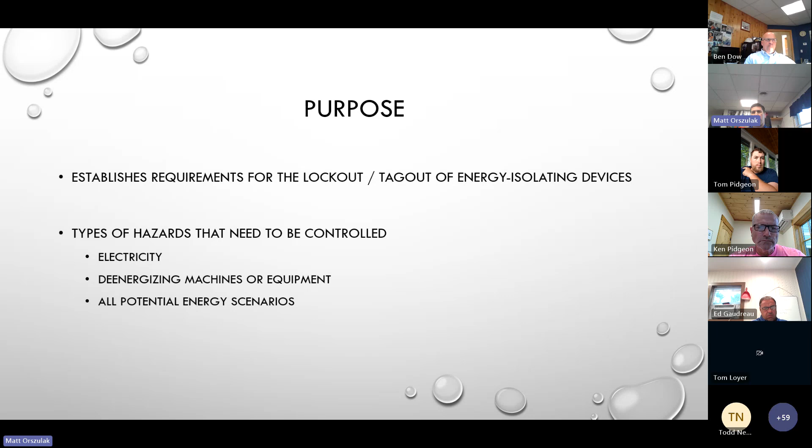For the purpose of this training, we're going to focus mostly on de-energizing machines or equipment, kind of the best practices. The biggest thing we need to do, like with everything in safety, is communication, communication, communication, once you're aware of the situation. So awareness first, then communication. Prepare for the shutdown, notify all affected employees, let everybody know what's going on, that this piece of equipment or tool is defective, it's not working properly. Then let's shut down the machine or equipment by disconnecting its energy source.

Sometimes it's as simple as taking the keys out, removing it, and putting this caution out of service tag out there. Because we want to make sure that the energy isolating devices are physically located and placed in the off position to disconnect from its energy source. It's the biggest thing - it can't move while someone's underneath it or around it. It can't shift or move, and someone could get pinched, struck, or caught in between all those hazards.

Tom and myself purchased more of these caution out of service, do not move tags. We're going to not only have them here at the shop, but we're also going to have all the foremen have them. So if there is an issue on a piece of equipment on a job site, we could tag it out, or the foremen can tag it out before the mechanics even get there, so everybody is aware and has that proper awareness not to jump in a defective piece of equipment. That's something new we're adding to our lockout tagout program.

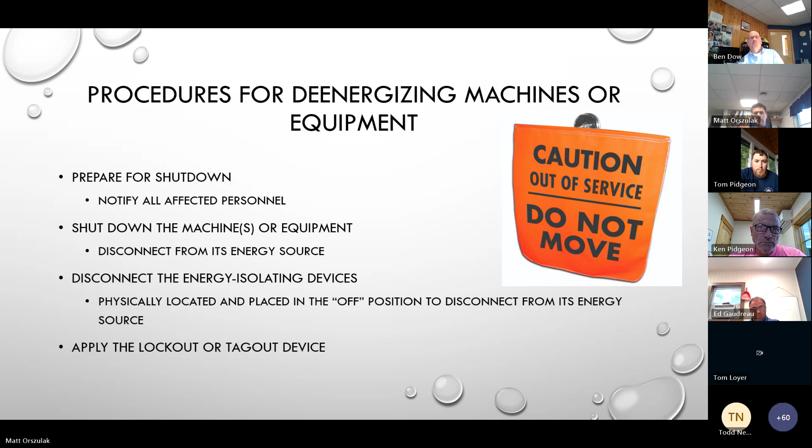Then we have just as that other potential energy sources, and that's one of the big ones that we have on the JHA every day, just as you're surveilling and looking at your job sites of what could potentially go wrong regarding potential energy. We have some basics on the JHA that we kind of preloaded that you can select. If there are any additional ones that you guys want to see us have on our JHA, please let us know - it's an easy update that we could do.

We just want to make sure we're paying attention to these potential hazards, because these are the ones that can really hurt somebody pretty bad. So we've got to put a high priority on our awareness on our job sites, because a lot of times we might have to get an engineer involved regarding if it's holding up a duct bank or digging deep next to a foundation or something like that, so we're covered in a really bad situation. That's really all I have - just raising the awareness and making sure we're tagging things out, and everybody knows we're not utilizing defective equipment, and who the affected employees are.

Anything to add? Yeah, if you see us this coming week, just make sure to - and if we don't give you a flag - just make sure to remind us.

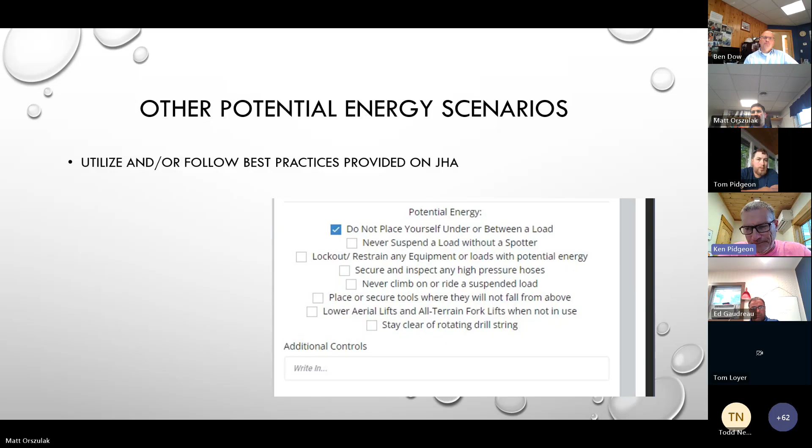Thanks, also Tom, I think of doing the load test, anchor load test - a lot of potential energy built up when we pull on anything with a jack, especially when you bring it to very high loads. Okay, thanks guys, take over the screen here. You're welcome, sounds good.

Can you see my screen? Yeah, we see you zooming in to 150. All right, oh, and you can see me zooming in. Good, all right.

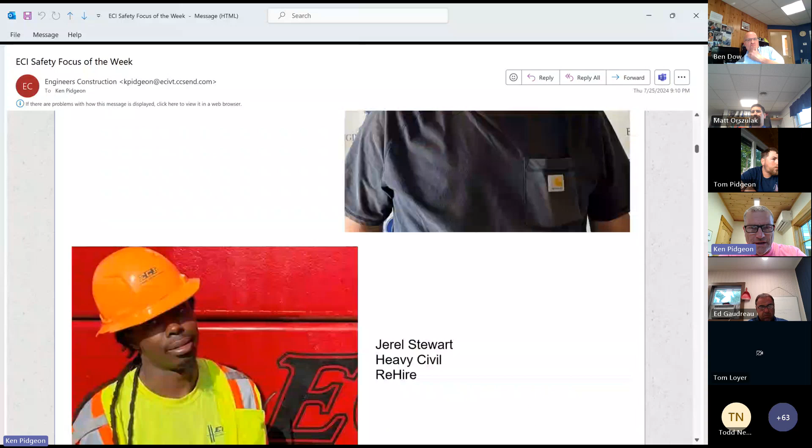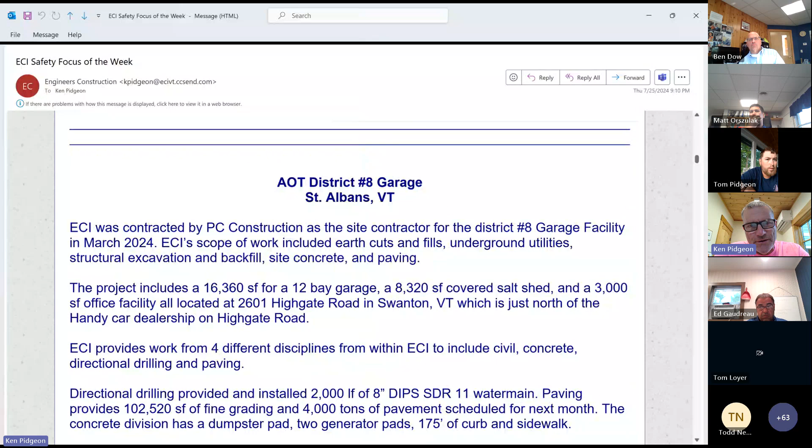We have Ed. Ed, do you want to drive or you want me to just scroll down as we go? Oh, I'll let you scroll down, Ken. Okay, sounds good, perfect, all right.

Good morning everybody. Before I start, I just want to give a quick shout out to the crew that's here and has been here since the very beginning - Marcos Carter, Landon Underwood, Dan LeDuc, Mike Ronaldo, Chris Potvin, Alan Nutting, and all the truck drivers that have serviced the project. Those guys have done a great job, and we don't have a long ways to go - we're seeing daylight. So we were contracted with PC Construction as the site contractor for the District 8 garage facility in March of this spring. Our scope of work included cuts and fills, underground utilities, structural excavation and backfill, site concrete, and paving.

So the project is actually 3 structures: a new garage, salt shed, and office facility. The garage is a 12-bay, 16,360 square feet. The covered salt shed is 8,320 square feet, and the office facility is 3,000 square feet. It's located actually in Swanton, but they're calling it the St. Albans garage.

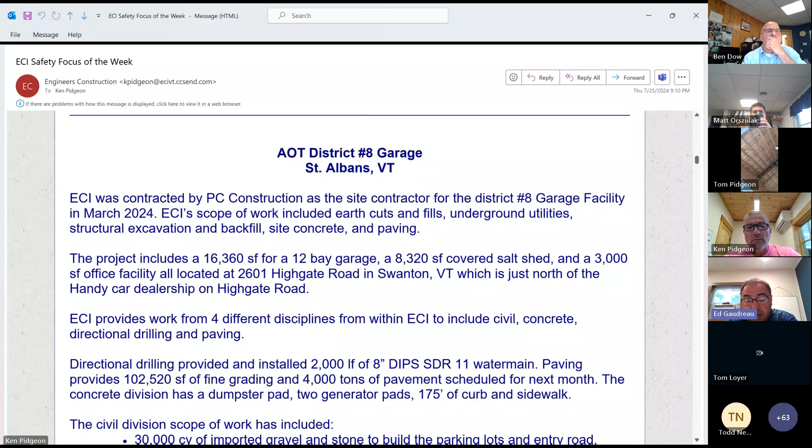The concrete division had a dumpster pad, a couple of generator pads, and we do have some curb and sidewalk that's going around the office facility, which is the next up on the list to complete.

Obviously, the civil scope was the largest part of the project. We had to bring in 30,000 yards of gravel and stone for the parking lots and the entry road. The civil group, on top of what the directional drilling crew did, installed another 2,400 feet of C900 water main and 80 feet of 6-inch C900 for the fire suppression line going into the garage.

There's also 5 drainage structures and 400 feet of 15, 18-inch drainage pipe, 800 feet of 2-inch SDR 21 sewer forced main with an above ground leach field, a little sewer pump station and septic tank, and excavation and backfill of 4,000 feet of power and lighting conduit with 4 transformer vaults, 7 light pole bases.

A few things that I didn't include: there's also a couple of large wetland ponds that we've built, and probably the toughest part of the whole project was starting in May. On top of our contract, we ended up having to build huge amounts of temporary road just to get to the site and get concrete trucks in here. That was well over $150,000 worth of work just to get to the site.

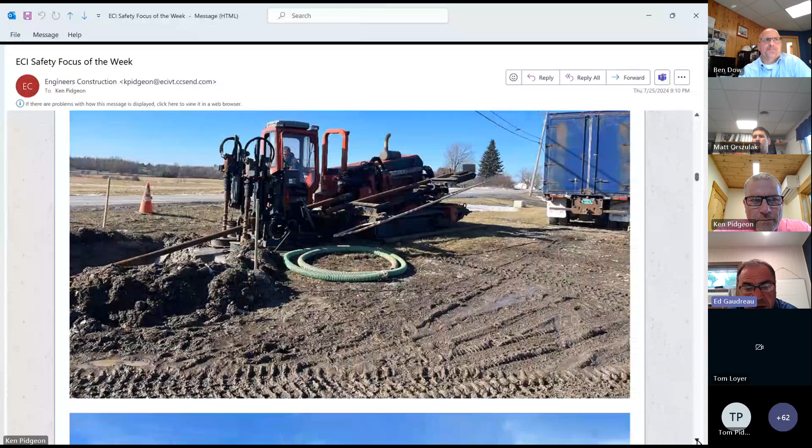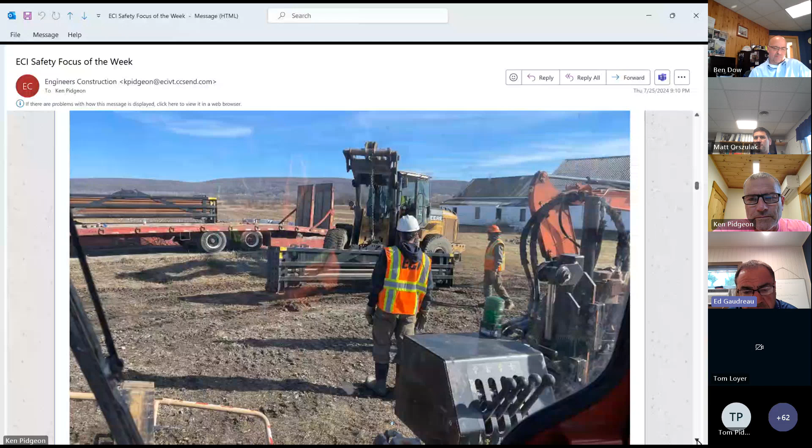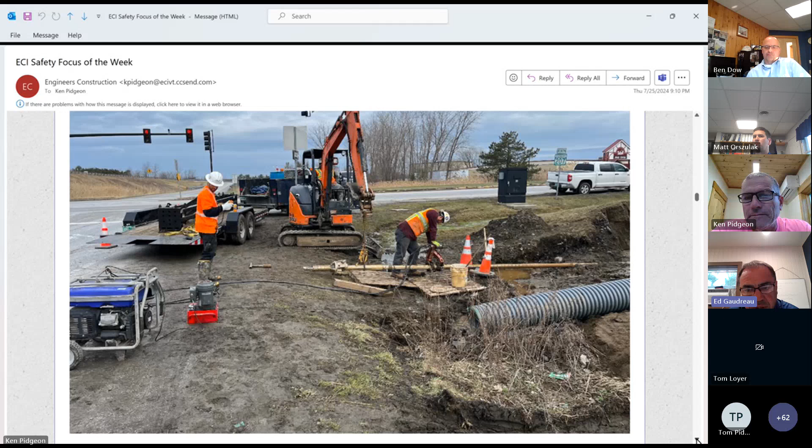Here we are again, it's a rock reamer. All right, yeah, we're right down there on the off ramp off of 89. Yeah, that's where Tractor Supply would be, across the road next to that building you see. Correct. Yep, out past that white pickup.

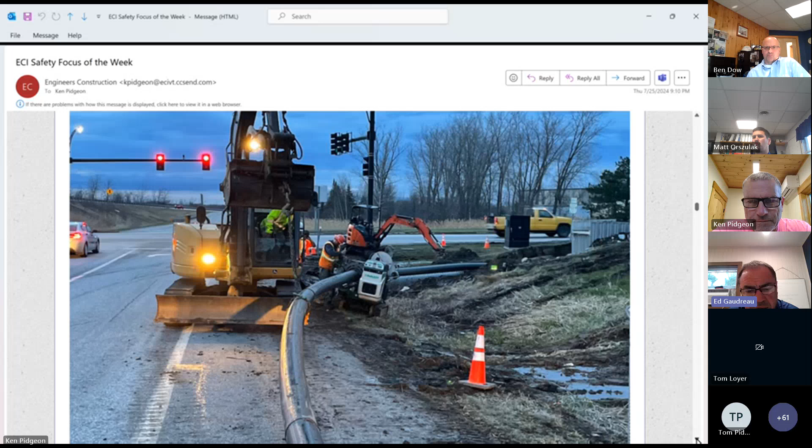Here we are pulling the 8-inch back through. They actually strung it out along the off ramp, the 1,000 feet, and they're pulling back, north on 207, for the first 1,000-foot shot. It looks like they had to do a fusion, so they pulled back in segments, fusing as it went.

You couldn't run this right up the interstate? We tried to stay out of sight of everybody, Ken. We were trying to be low profile here. Yeah.

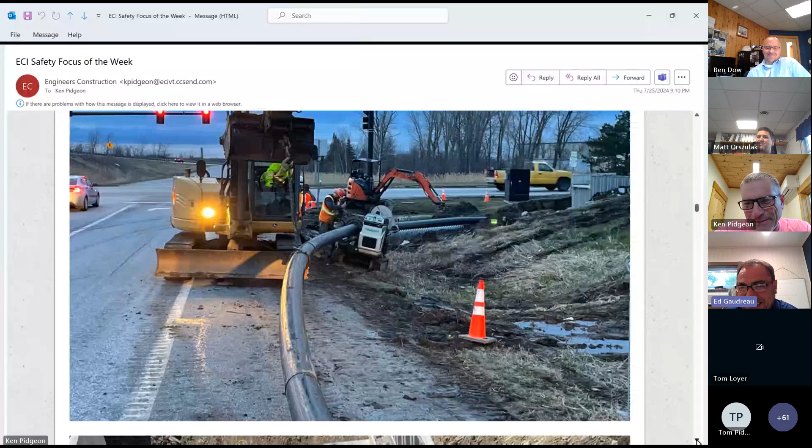This is actually just a month or so ago, after the directional drilling was in. We had to make a few connections, add in a fire hydrant that the town had asked for - well, actually they didn't ask for it, they moved it. So our civil crew went in and cut into the directional drill pipe and added in the gate valve and the hydrant valve. This one's actually right down across the road from Tractor Supply, on the Handy dealership side of the road.

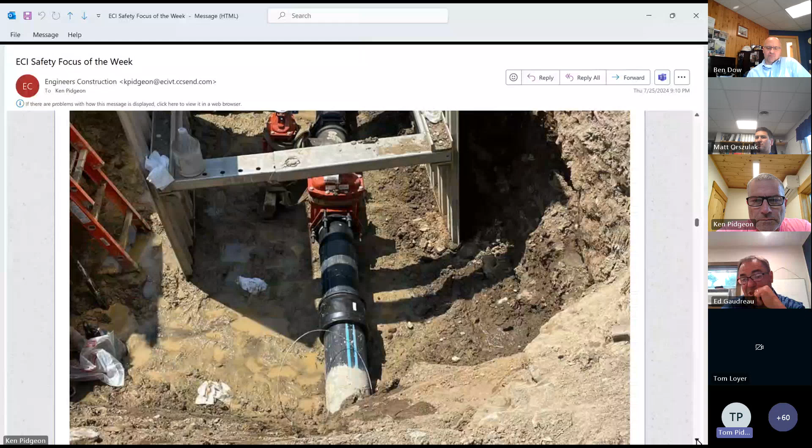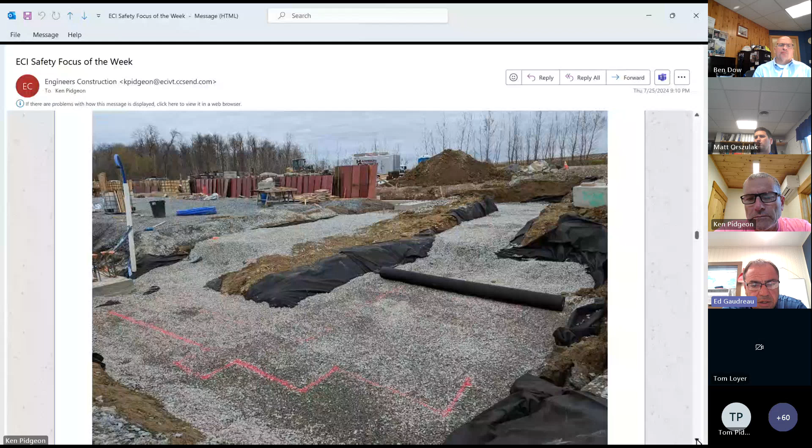And here's the site early on. We started with this, actually the garage, 12-bay garage. They didn't specify stone under the footings, but they wanted it, so we had to add that in with some fabric. So we're prepping. You can see Harrison has started forming behind us.

But it was used as the access for this site. You can see just ahead of the track truck where we added a bunch of 5-inch rock, just to get concrete trucks and pickups through there when we started the work. So it was quite an effort to get everybody going.

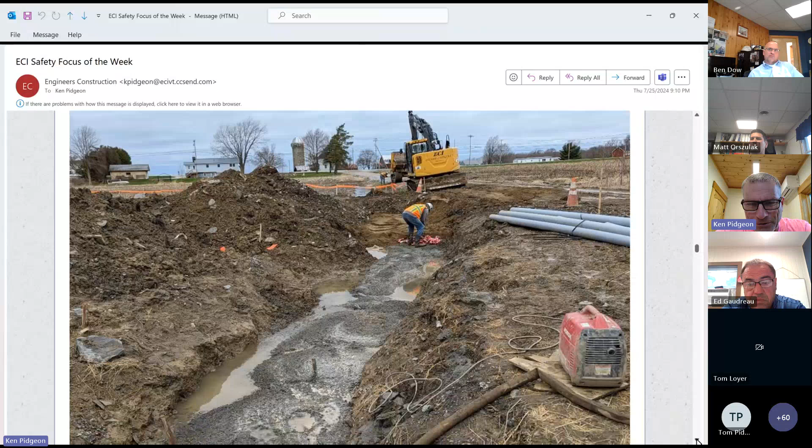Especially early in the year when it's always wet and soft, right? Yeah, when we first took this project on, the idea was it was going to be some nice spring work for us, because we were intending on just going and putting in the water main out through the cornfield and along 207 into the site. But PC, like most GCs, they want the concrete in the ground first, which was fine by us. They helped us and took care of us to build a temporary road to get concrete trucks in. So we spent the first 4 or 5 weeks doing that.

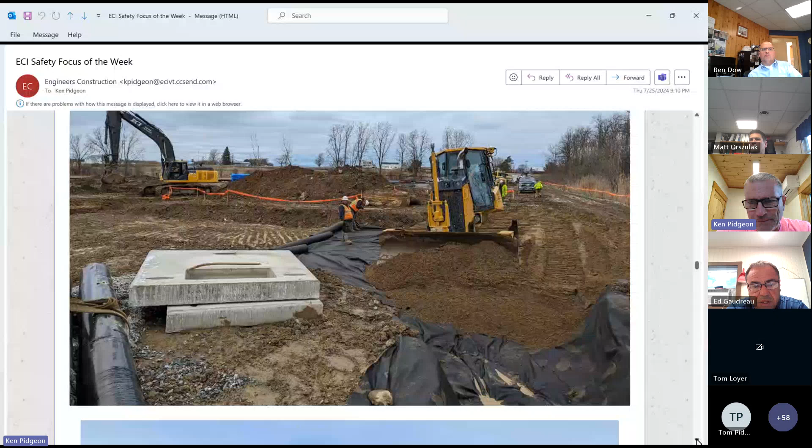Here's one of the transformer vaults, which is actually at the garage, 12-bay garage site. I think right here we're actually building the new driveway into the garage off of what will eventually be the paved road, but it's a couple feet of mud right now to the right. Right, to the left, it looks like it must be parking lot, right? Yeah, to the left is the driveway back to the parking lot for the garage.

We are with some more site lighting conduit across the parking lot.

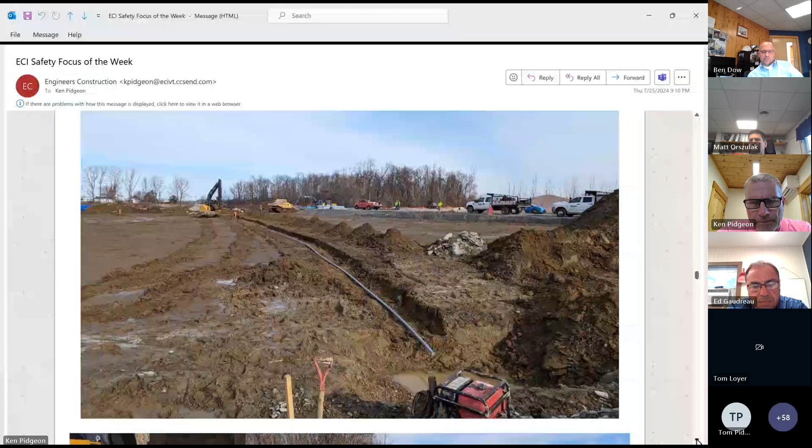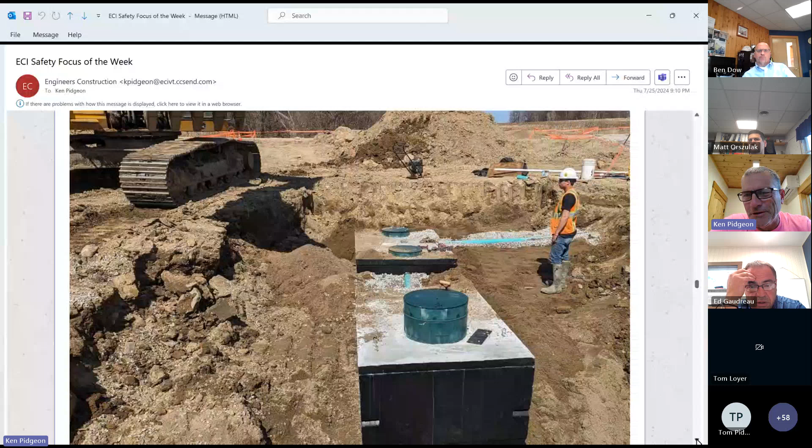We just got done installing the septic tank and the little pump station. This looks like a dry day sometime this past spring - the soils here are really conducive to making a lot of snot when you get just a little bit of rain. They don't seem conducive to a leach field. Well, it's an above-grade leach field mound system.

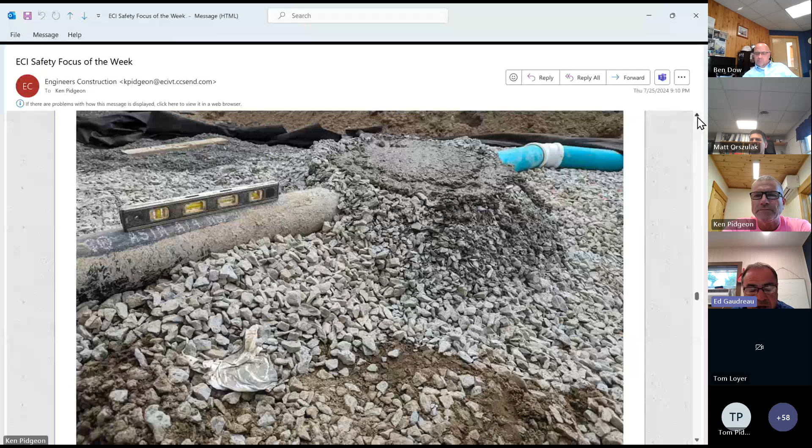I like this, just verifying our pitch. There's the plumber's cast, and that was another thing - this is the typical architectural mechanical stuff they just boilerplate in, so all of the under-slab sewer piping is cast iron, which is kind of outdated. But here's the sewer line coming out of the garage and our connection to it. Then we had to run across the parking lot with our SDR 35 over to the septic tank, which is one single septic tank serving the garage as well as the office facility.

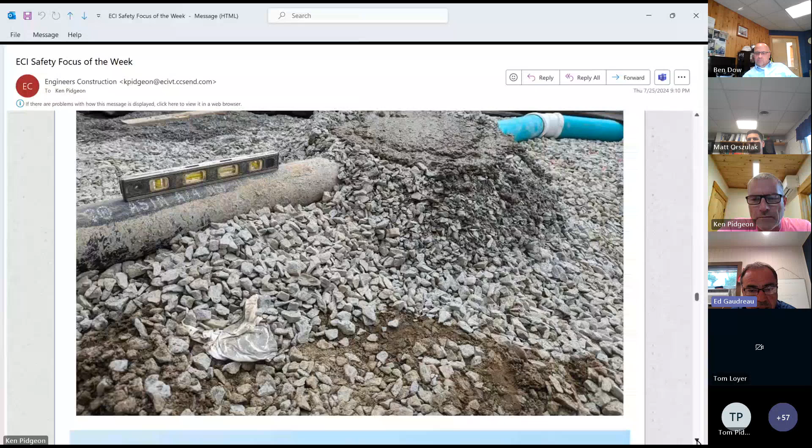And that was Wayne's idea there, Rustin, with the concrete around that gravity sewer, just for protection, because we had to do a lot of work around there.

The big site, so imagine that side by side came in handy. Marcos likes that side by side. He does a lot of traveling with it, but it's been used to lug our stuff around, because especially in the spring, there were a lot of times you couldn't even get a pickup to where we had to get to. So the side by side was handy.

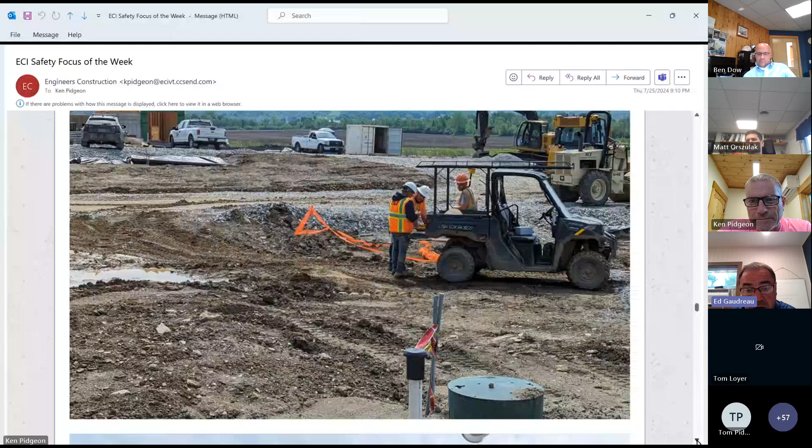There's Ethan Bartlett with the Rover before he got done. Should have mentioned him because he was a part of this project as well. But Alan Nutting and Marcos there on the tailgate of the Ranger.

You should have done the photo archives of the Gator circa 2008.

Here's Marcos and Landon putting in under drain, foundation drain around the garage footing.

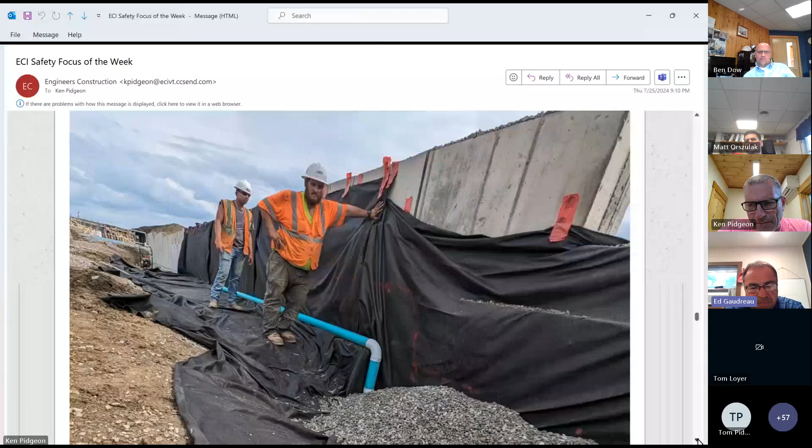It's 4-inch. Looks small, whatever it is. It is, it's 4-inch. Yep, it looks small, because I guess everything else is larger. Large, right? Yep.

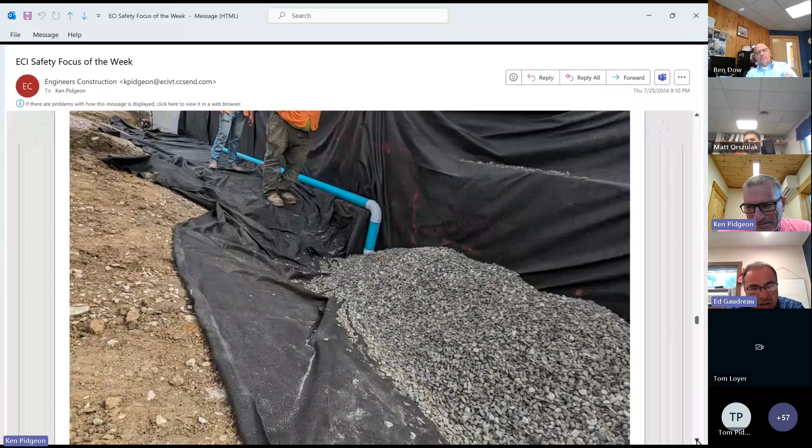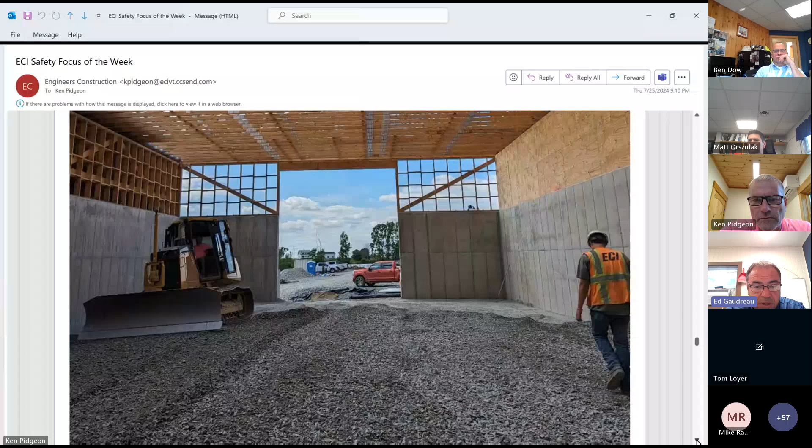A lot of roof trusses there. Yeah, that's the salt shed. We're putting the gravel in, and this is actually all paved now. The pavers were here last week and got it fine graded on the interior and got it all paved. There's 2 bays, and then there's this brine mixing shed as well attached to this building, which needed to be paved on the inside too. So the pavers have been here once, and they got the base and the top in inside of this building, and it looks great. So that was a good job.

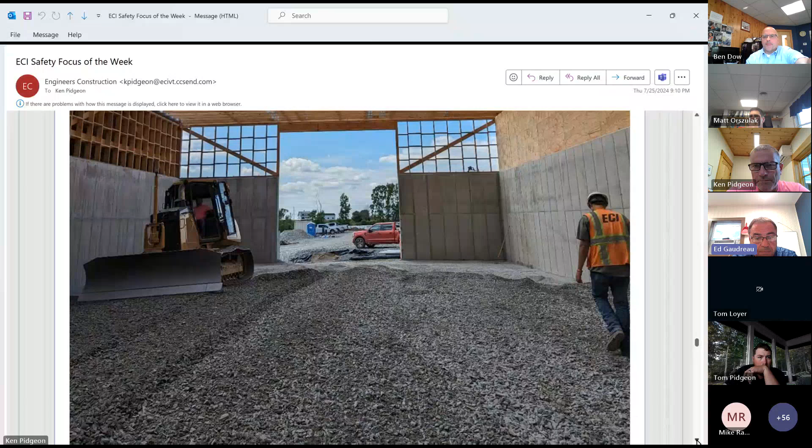We are installing the vertical insulation on the outside of the garage foundation. You can see this is just a few of the bollards that went in, but there's probably 4 overhead doors we're looking at to the left, and 8 more behind it.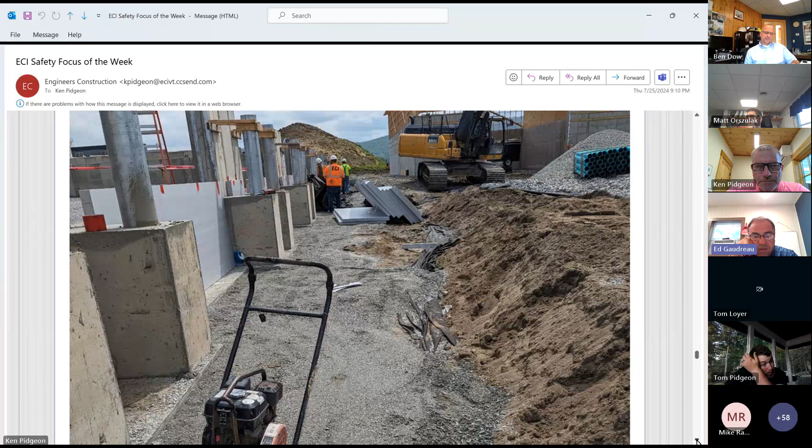Yeah, it's a pretty long building. I think it's 250 feet long or so and 85 feet wide. It's all there. Wow, nice shop. That's what we need, a shop like that, right?

Mr. Wells would like this.

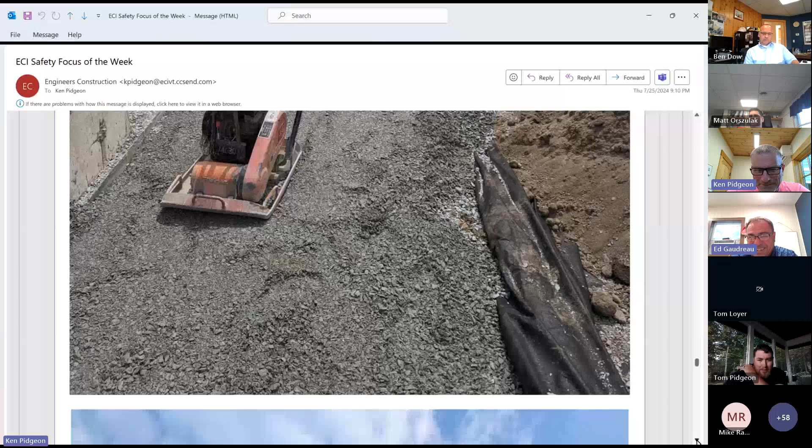Here we are box cutting the existing road, the existing town highway coming out of the garage site, and it's a reconstruction. So we're chasing it with the dense grade, though you can't see that in the picture.

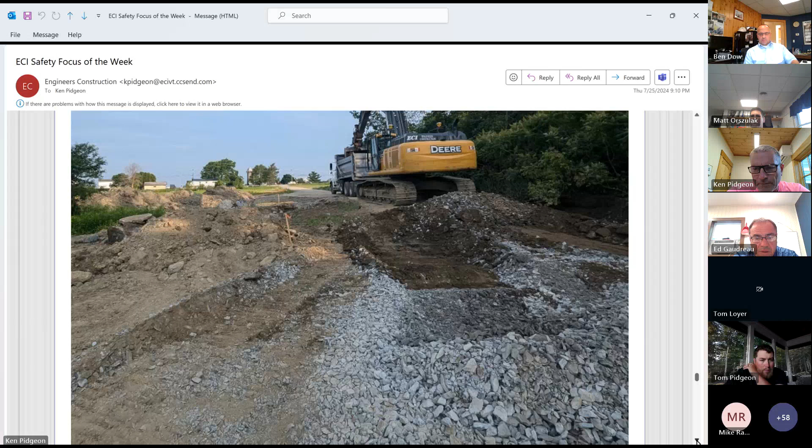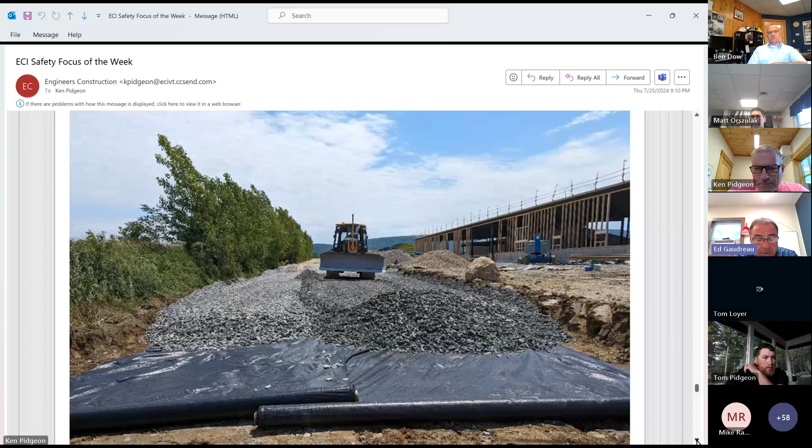That's Chris Potvin in the 380 there, though you can't see him. And here's the backside of that. Dan Ledoux running the bulldozer, the 550, and a couple guys rolling out fabric. Mike checking with the rover, keeping us at the right width.

Yeah, that's what we got. Well, thanks, Ed. That's a pretty cool project, pretty intense with the 30,000 yards and working in kind of slimy conditions for a lot of the year.

So far, it's still wet. It hasn't even dried out this year yet, right? Not really, no, it hasn't. Yeah, we had a little rain last night, so if you walk around now and you're not on the parking lot, you're gonna get a solid inch or two of mud stuck to the bottom of your boots.